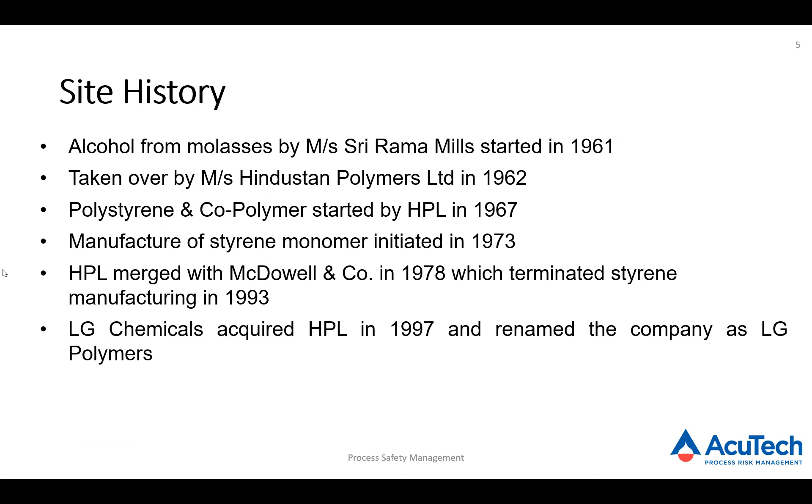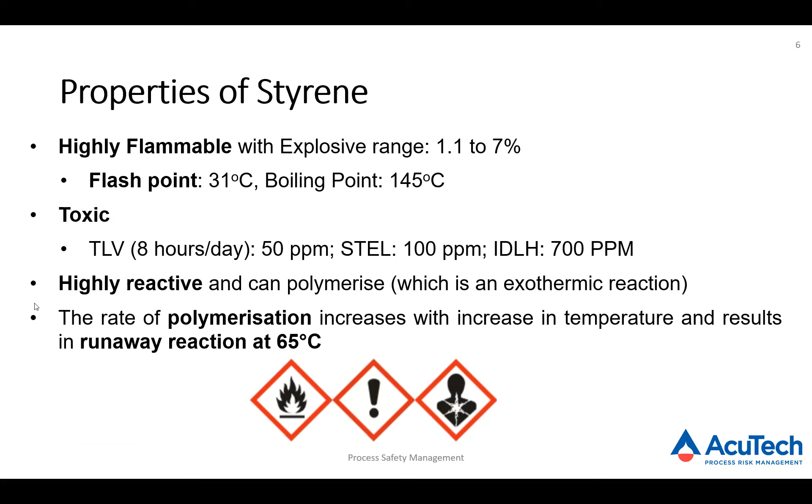What happened on that fateful night of 7th May 2020 was that LG Polymers was in the process of restarting the plant after the lockdown when this event happened. Uncontrolled styrene vapors were released from the breather valve, flame arrestor, and dip hatch of one of the M6 storage tanks. There were two storage tanks, M6 and M5, and from this tank there was an uncontrolled release of styrene vapors.

The maximum temperature of this tank was noticed at around 154 degrees centigrade, which is equivalent to 1.25 atmospheric pressure, and this led to uncontrolled release of styrene vapors, affecting nearby villages. There were about 12 fatalities, 585 people were hospitalized, and there was loss of livestock and damage to the environment. This was probably caused by the polymerization and runaway reaction of styrene due to increased temperature. And this webinar is discussing the reasons why it would happen.

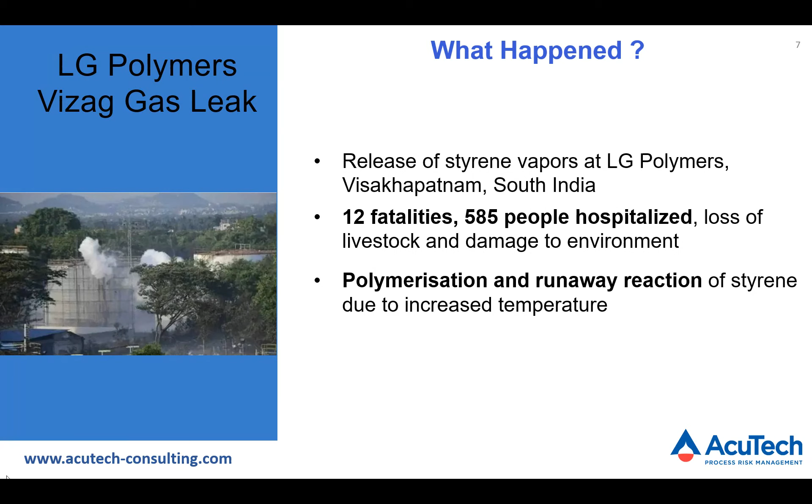This is the brief chronology of the events that occurred on that night. The plant was being restarted after a lockdown period due to the COVID-19 pandemic situation. The plant was down from 29th March till 6th May. There was very less manpower at the site than the usual deployment. Startup activities were initiated on 6th May, and in the early hours of 7th May, the tank temperature started increasing. Around 2:54 am, a gas detector alarm was heard in the DCS.

The DCS operator informed the site personnel around 3:02 am, and after that, between 3:30 and 3:35, the director and safety heads, police, fire service, etc. arrived at the site, and the evacuation of the site personnel was started. Simultaneously, the fire service also started using the deluge system. Around 5:15 am, they started dosing of high temperature inhibitors, NDM and TDM. At 6:30 am, the styrene pump out from the storage tank was started to reduce the inventory in the storage tank, and the inhibitor addition was stopped.

It was continued till 3 p.m., but the tank cooling was still continued as the temperature was still on the high side. Around 9:15 p.m., additional evacuation of residents on the upstream side of the plant was started because people were getting affected by the uncontrolled release of styrene. The maximum temperature was observed at about 154 degrees centigrade around 10:45 p.m., and still the tank cooling was continuing.

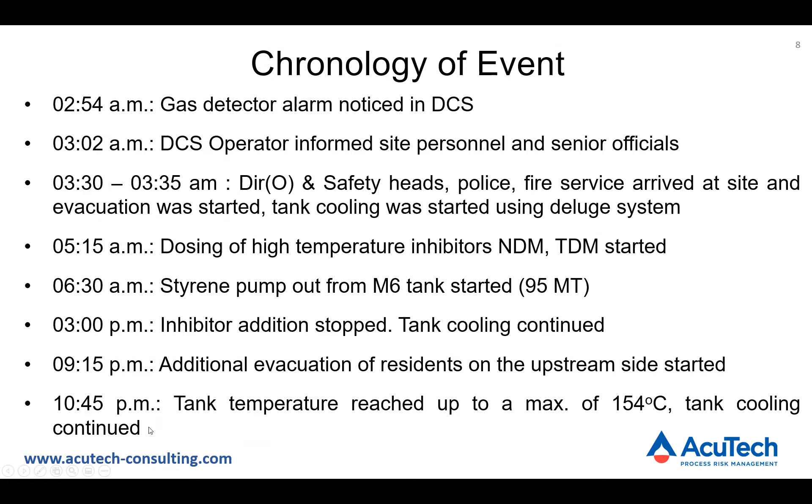What went wrong here? As the father of process safety, Trevor Kletz, had said, a case history shows that an accident generally does not have one cause, but it has many, and the deeper we go, the more causes we find. Every incident takes place when there are multiple failures. Human failures in design, operation, and emergency response were evident in this incident as well.

Similar failures were observed in the Bhopal gas tragedy, which took place in 1984. This emphasizes the importance of implementing process safety management systems consistently in everything associated with a chemical processing facility. If hazard identification, risk analysis, and operational discipline are of high standards, then certainly such incidents can be prevented.

Here, there are some contributing factors which the report has identified. It can be seen here. There were failures with respect to the tank design, tank temperature measurement and control, recirculation and refrigeration system, inhibitor addition protocols, and the polymerization runaway reaction which was caused by thermal or catalyzed polymerization. This conforms to the famous Swiss cheese model, according to which several failures in the protection layers, when they get aligned, lead to an incident of this magnitude.

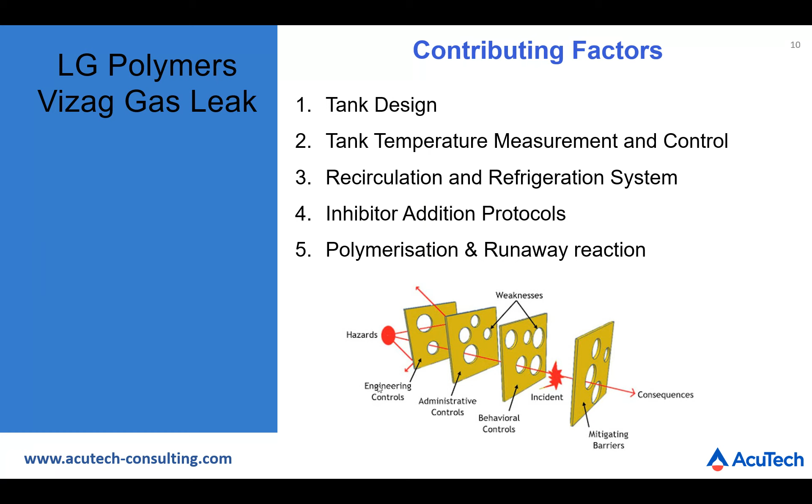Now I request Marty to take over with respect to some features about the tank design. Yes, Marty, please. Okay, thank you, Vijay.

Okay, let's talk about the M6 tank design. The M6 styrene monomer storage tank is a vertical atmospheric tank with a capacity of about 800,000 gallons of unlined mild steel. It's equipped with a set of pumps that can circulate the contents through an external refrigeration unit. The cooling system is operated manually based on tank temperature. However, during the plant shutdown, it was operated daily only during daytime working hours. The tank is insulated to prevent external heat gain, which would increase the cooling demand.

It was built in 1967 for molasses storage, when the plant was used to produce alcohol from molasses, and was repurposed for styrene storage in 1977, when the plant began producing styrene monomer. It's equipped with a flame arrestor vent, a dip hatch vent, and in addition, there is a foam injection connection on top of the tank. In the background, you can see the adjacent M5 tank, which is also used to store styrene monomer and has a similar setup. The M5 tank is a new tank and was installed in late 2019.

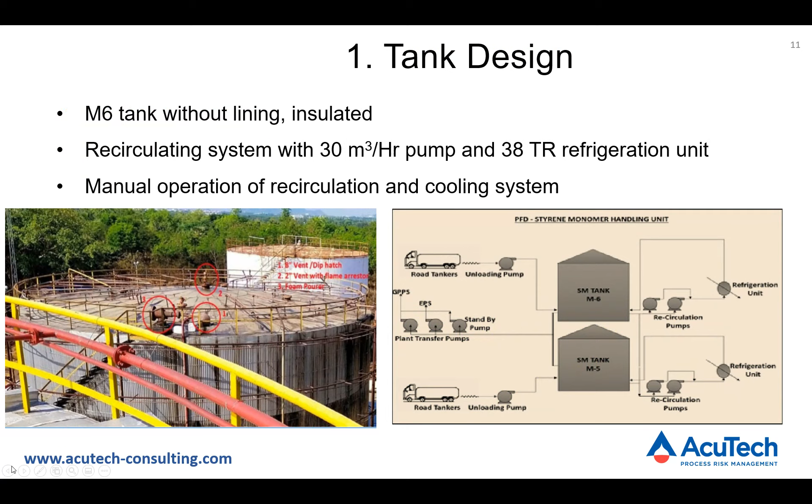There were several issues with the design of the M6 tank. One problem with the tank design is that it has an internal roof support structure which provides additional surface area for styrene vapor to polymerize and accumulate, which forms stalactites inside the tank.

Also, originally, the styrene circulated back to the tank through a float valve, which floated on top of the liquid to provide circulation and mixing from the bottom of the tank to the top. However, in 2019, this float valve became stuck in the stalactites that had formed on the top of the tank.

And the site decided to change this setup from the float valve to a fixed dip pipe to the bottom of the tank, which resulted in the loss of mixing from bottom to top. Liquid was now withdrawn from and returned to the bottom of the tank, which, as we'll see, created layering and temperature control issues. This was increased due to the lack of fresh styrene unloading during the COVID-19 lockdown in the past several months.

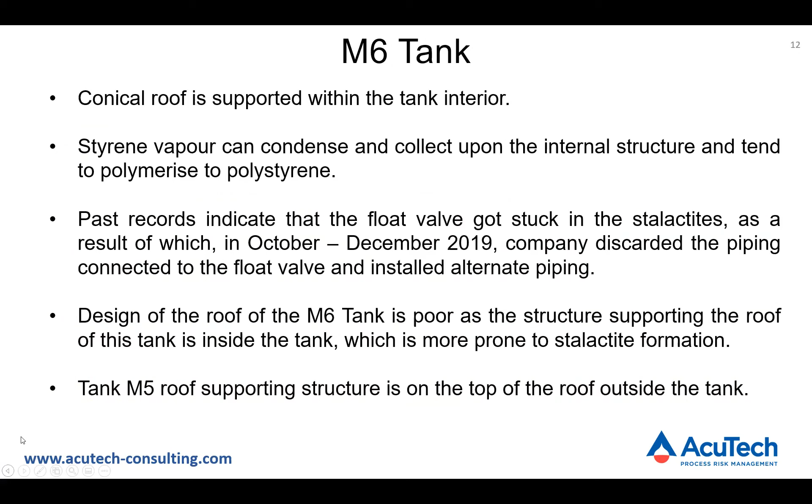By comparison, the M5 tank has an external roof support structure which avoids the stalactite formation issue associated with the internal structure. In addition, there has never been a mechanical integrity inspection of the tank in the 53 years that it's been in operation, including the 43 years in styrene service. This includes an evaluation of the fitness for service of the tank and a life extension if warranted.

As indicated, the material of construction is unlined mild steel, which serves as a catalyst for styrene polymerization. Lined steel is recommended to prevent this potential from occurring. Another issue is that the tank is vented directly to atmosphere instead of to a mitigation system for routine and emergency venting, such as a flare or cryogenic condensing system to prevent release to the atmosphere.

One additional problem was that the plant noted that there was a large crack on top of the tank at the foam injector connection that had existed for some time. And again, the recirculation loop design change created an issue with loss of mixing, which you'll see in the next slide.

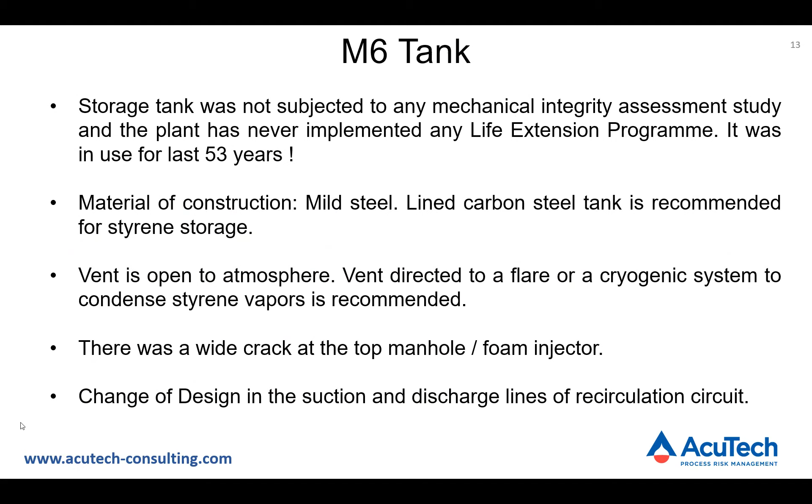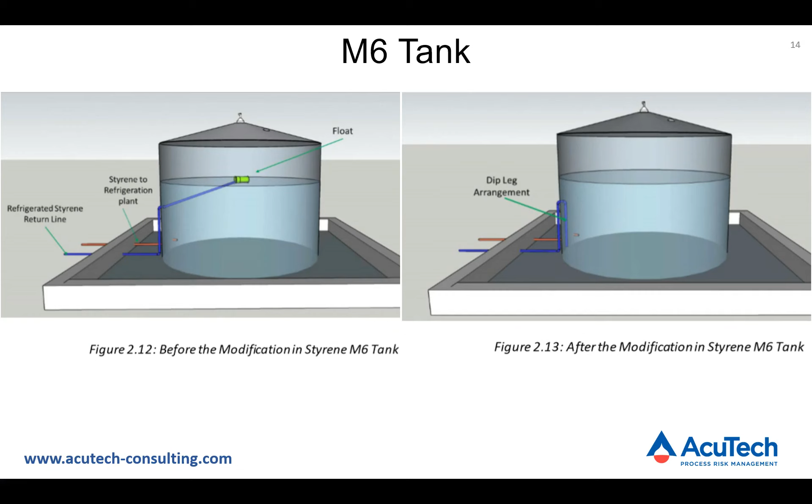There were also issues associated with maintenance of the M6 tank. From vendor literature, we see that cleaning of the tank at least every 2 years to remove accumulated polymer is recommended, in addition to having the internal lining or coating to minimize polymer formation. However, the plant policy was to clean the tank every 5 years, with the most recent cleaning being completed in 2015. This allowed for a significant accumulation of polystyrene polymer inside the tank.

In addition, an inhibitor, TBC, is used to inhibit styrene polymerization during normal operation at low temperatures. Now, this is added by the manufacturer to the styrene received at the plant by tanker truck. Although the plant should have been able to add TBC to the tank if needed, they did not have any stock of TBC at the time of the incident. However, the presence of various contaminants in the tank, such as rust from the unlined interior surface, can also catalyze polymerization, which can exceed the ability of the TBC to mitigate.

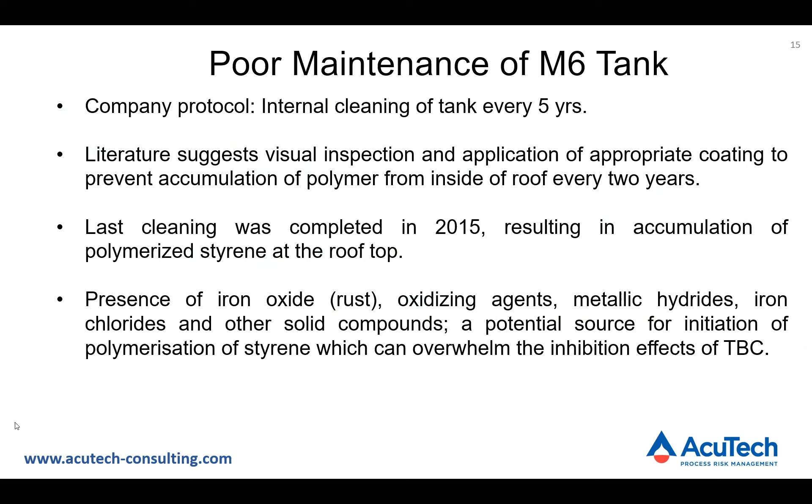And now we'll turn it over to Vijay to talk about temperature measurement and control.

Apart from the tank design and the issues with respect to the maintenance of the tank, there were some issues with respect to the temperature measurement and control system. The temperature measurement was restricted only to the bottom zone of the liquid, whereas the top and middle zones may have different temperatures because of poor mixing. As we saw, the modification was done without ensuring that the mixing would be adequate.

There should have been at least 4 to 5 temperature measurements along the 12-meter height of this tank to measure the true temperature of the different zones in the tank. The tank M5 had temperature measurement probes at 3 locations, but M6 had only at the bottom. And the operations staff always believed the bottom temperature to be the temperature of the whole bulk of the liquid, which was incorrect, and that led to the thermal stratification.

As can be seen in those figures, the first figure indicates that even though the bottom temperature might indicate 17 degrees centigrade, the top layer could be at around 35 degrees centigrade, wherein the polymerization can initiate. This also causes issues with respect to the TBC content. If the temperature is around 17 degrees centigrade, the TBC content, which is expected to be maintained at 15 ppm, would remain uniform throughout the storage tank. But if there is a higher temperature on the top layer, then certainly the TBC inhibitor content would also reduce periodically.

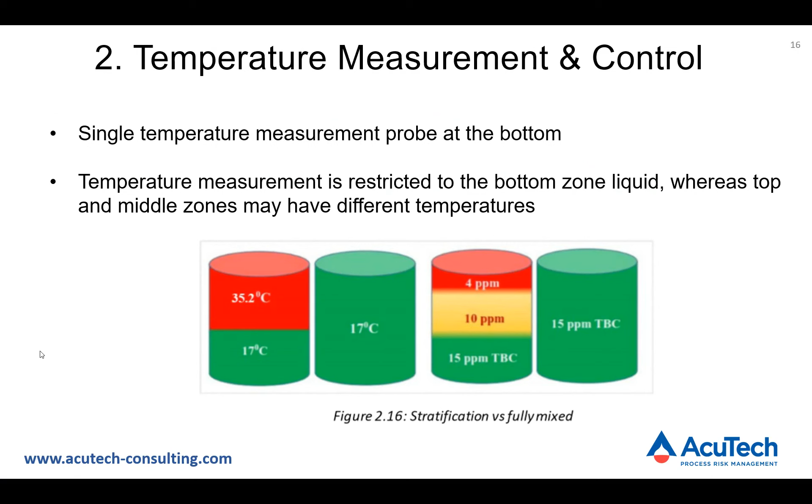This graph shows the temperature profile of the M6 tank. It is evident from this temperature graph that the temperature was by and large stable below 20 degrees centigrade until about 3 a.m. of 7th May. And then it started increasing thereafter. The rise in the temperature was sudden and occurred at fast rate, thereby pressurizing the tank.

The rate of increasing of the temperature slightly reduced between 5 a.m. to 9 a.m. and thereafter again started increasing, even though the tank cooling measures were being undertaken by the site using the deluge system. From 3 p.m., there was a further increase in the rate, and finally the temperature peaked around 154 degrees centigrade. That was recorded around 10 p.m., which was equivalent to 1.25 atmosphere pressure, and that continued the release of styrene vapors in the uncontrolled manner.

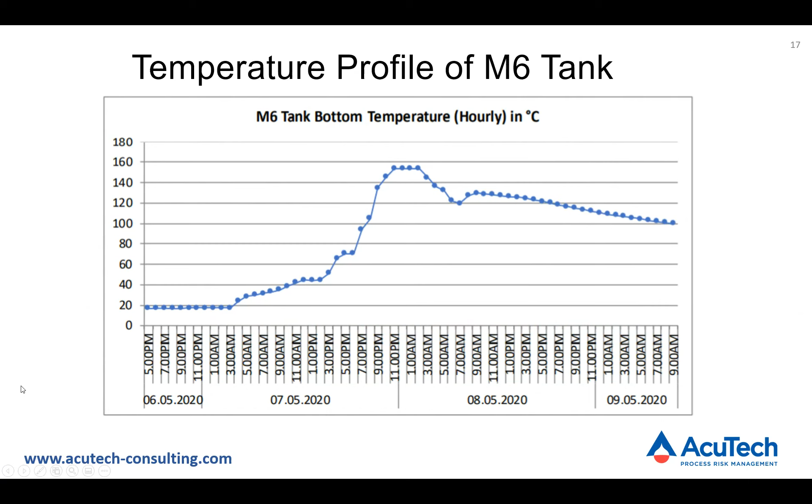Apart from the cooling methodology, there were issues with respect to the recirculation refrigerant system. The preferred storage temperature is in the range of around 10 to 18 degrees centigrade with upper limit of 25 degrees centigrade. If the temperature approaches 20 degrees centigrade, the tank contents must be cooled. It was revealed that there was no high temperature alarm on the tank. There was a practice to operate the refrigerant system manually during 8 a.m. to 5 p.m. every day. However, on 6th May, the system was stopped at around 3:45 p.m., assuming that the tank is cold enough.

Temperature of liquid styrene monomer is very crucial factor. The temperature maintenance throughout the large storage tank at around 15 to 20 degrees centigrade is essential in the light of possible runaway polymerization. For a place like Visakhapatnam, the temperatures mostly ranges from 20 to 36 degrees centigrade. It is essential to operate the refrigerant system on a continuous basis to ensure that the temperature at all levels is below 20 degrees centigrade.

It was also put forward that possibly the R-22 contamination could have happened due to the leaks in the refrigerant system because the mechanical integrity of the cooler in the refrigerant system probably was not ensured. Possibly there were chokings inside the refrigerant system valves and lines which might have clogged during the shutdown period, and the contents could not have been cooled as the pump motor had tripped due to the viscous polymer present.

Now we'll talk about the testing protocols. Marty to take over.

Okay, as mentioned earlier, TBC is used to inhibit polymerization of styrene at low temperatures. For the temperature range normally maintained in the tank, this requires a concentration of 15 parts per million of TBC to be maintained, as Vijay indicated. Routine sampling and analysis should be done to confirm the proper TBC level, ideally daily sampling from both the top and bottom of the tank.

During the lockdown, however, samples were taken sporadically from the bottom and top of the tank. Due to the change in the circulation system and loss of mixing, samples taken were not representative of the bulk contents of the tank. It should be noted that the plant had not added TBC to the tank in at least 10 years. Due to the high turnover of material in the tank and the addition of TBC by the vendor to the deliveries, there wasn't a concern about the TBC depletion under normal operating conditions.

However, there were no styrene deliveries or usage during the lockdown period, which allowed the TBC level in the tank to drop, again undetected and aggravated by the loss of mixing due to the aforementioned circulation piping change, which also allowed for temperature differentials inside the tank. Higher temperatures increase the depletion rate of the inhibitor.

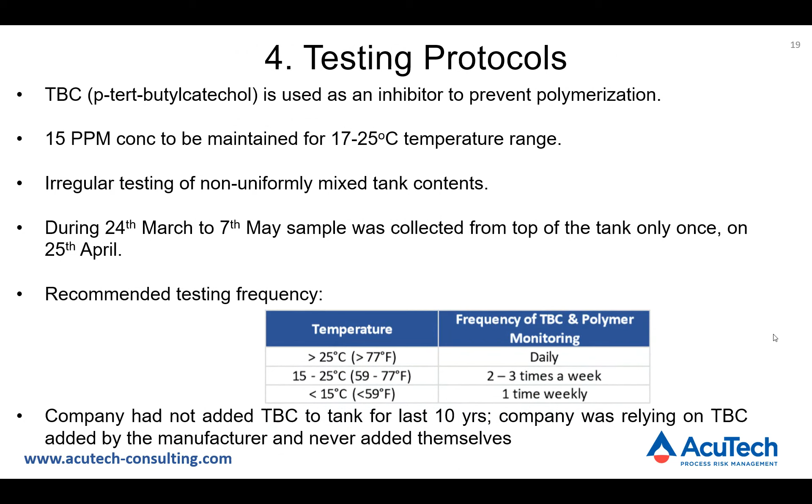Another issue with styrene is that when it is exposed to heat, it forms free radicals. These styrene radicals react either with oxygen to form peroxide radicals or with styrene to form the polymer chains. In the presence of sufficient oxygen, the peroxide formation is significant because this reaction of peroxide radical formation is much faster compared to the polymer formation with styrene. So oxygen works as a polymerization inhibitor, while TBC controls its efficient use.

Unfortunately, there was no monitoring device or monitoring system in place to measure the level of dissolved oxygen in the styrene monomer tank, in the M6 tank, or in any of the other styrene tanks at the facility. This is not acceptable, as dissolved oxygen is a critical input to the effectiveness of the inhibitor.

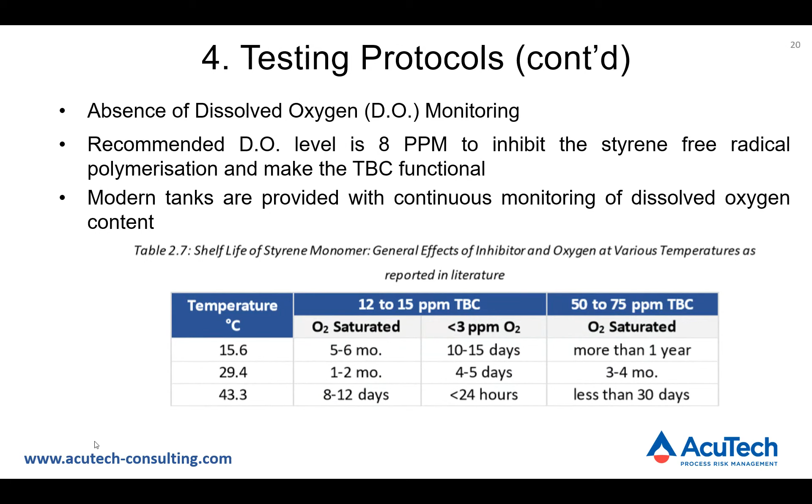As previously mentioned, polymerization generally takes place by free radical reactions, which are initiated by high temperature or a catalyst such as iron. The polymerization rate increases at higher temperatures, which is increased due to the heat generated by the exothermic polymerization reaction.

Since there's evidence that the effectiveness and concentration of the TBC inhibitor was reduced and bulk mixing and cooling was inhibited, it's apparent that this incident was caused by a runaway polymerization. Lack of dissolved oxygen may also have been a contributing factor, as well as the presence of polystyrene stalactites, which may also catalyze further polymerization if they contact the liquid.

Analysis records indicate that the level of polystyrene contamination of the tank increased slightly in the month prior to the incident and dramatically in the 10 days prior to the incident. However, no action was taken by the site as this was considered to be a quality issue and not a safety issue.

The increased temperature due to the runaway polymerization caused boiling of the styrene and subsequent vapor release from the vents as well as from the large crack at the foam injection point. Had these not vented the vapor, catastrophic failure of the tank could have resulted.

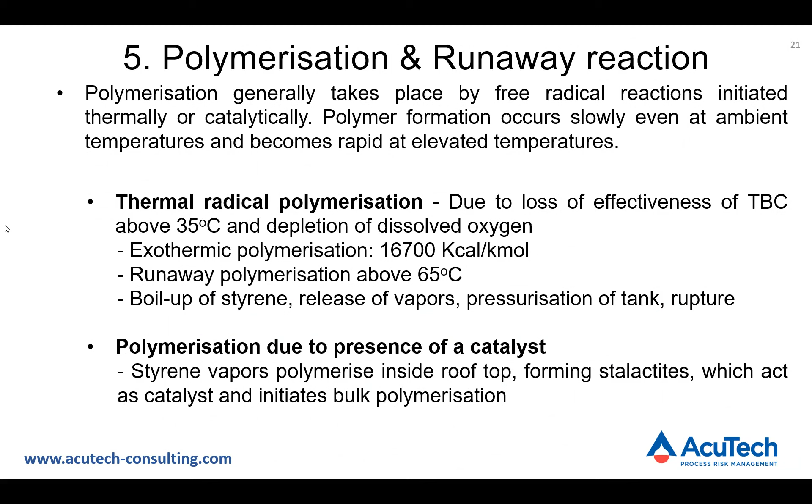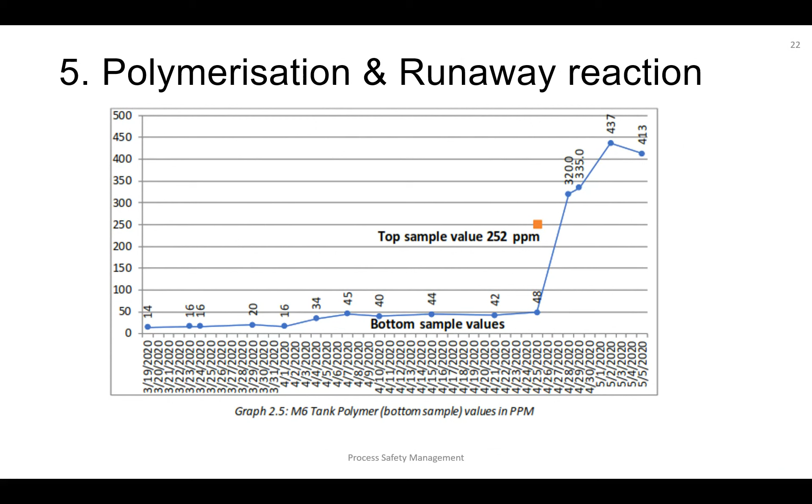Next, BJ will talk about consequences of the incident.

So these were the major contributing factors which caused this incident. There was about 1,842 metric tons of styrene present in the tank on the day of the incident, and it is estimated that about 818 metric tons of styrene vapors were released, and that caused the styrene concentration above 1100 ppm, which extended up to 420 meters from the storage tank.

This resulted in 12 fatalities and hospitalization of 585 people from nearby villages. And this required evacuation of nearly 20,000 people from the nearby areas. Around 17,000 houses and residences were evacuated.

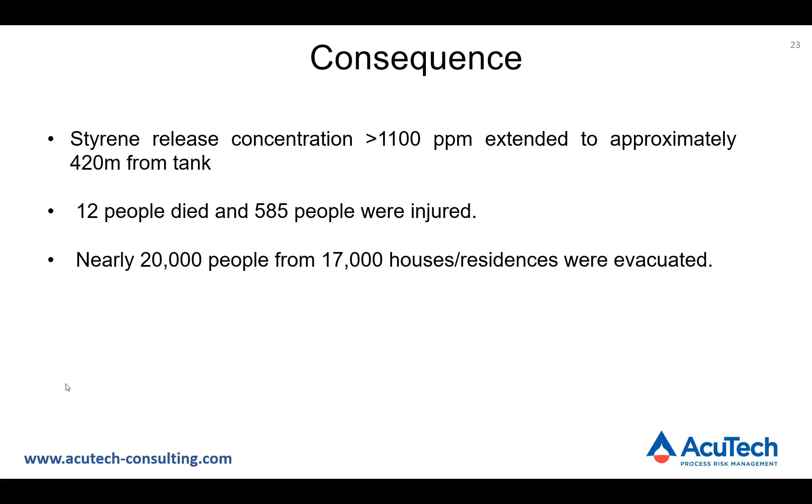Marty will talk about the root causes here.

Okay. The investigation report lists 13 root causes of the incident. These include modification of the tank recirculation piping, as we've mentioned, inadequate operation of the refrigeration system, inadequate temperature measurement and lack of alarms, lack of a tank lining and the external roofs and external roof supports, as well as internal cleaning, as recommended by the supplier.

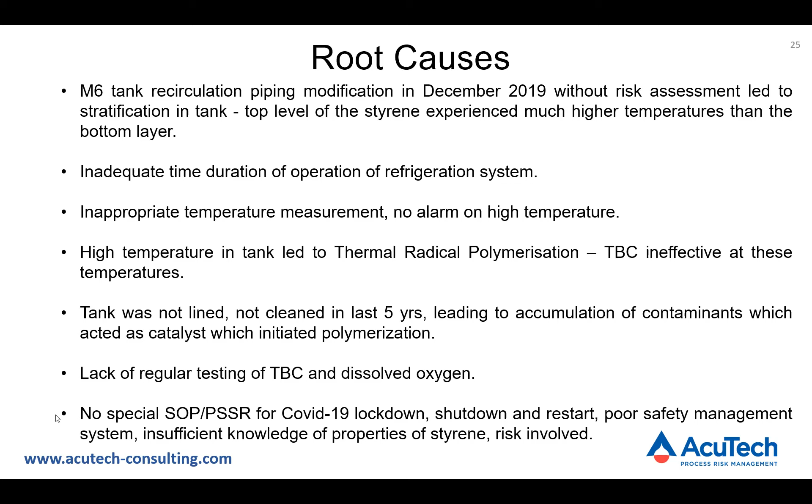As discussed previously, the fault tree for this incident identifies many root causes and contributing factors, including the poor tank design, including the internal roof structure, lack of lining, lack of temperature monitoring, circulation modification, and lack of cleaning. The lack of qualified and competent technical personnel. Poor temperature monitoring and control, including insufficient chiller capacity, lack of mixing, lack of temperature monitoring, and the heat gain due to circulation pump deadheading and inadequate insulation.

High polymer content in the styrene, which was not identified as a safety issue. Lack of process safety management system, and poor monitoring and control of the TBC inhibitor concentration, including dissolved oxygen, lack of mixing, which was aggravated by the lack of turnover due to the COVID-19 shutdown. All these issues are discussed thoroughly in the investigation report.

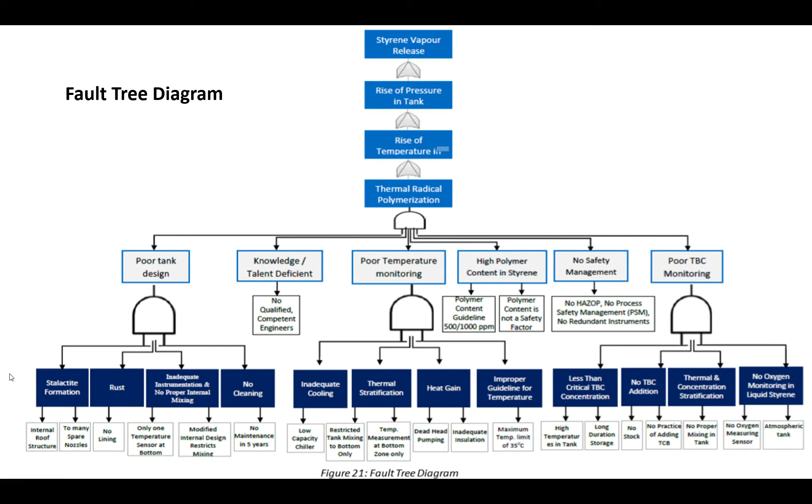Now Vijay will cover the recommendations from the report. Due to all these failures which were observed by the high-powered committee, there are suggestions to avoid the recurrence of such an incident either at the site or at other sites.

The tank must have a floating valve circulation technology which provides adequate styrene circulation and mixing to have uniform mixing and temperature control throughout the tank. There must be provisions for mixing in case this circulation system fails. The material of construction of the tank should be carbon steel with coating inside.

A few more suggestions were there with respect to automatic monitoring of inhibitor content and dissolved oxygen, and ensuring a siren during emergencies for raising an alarm to the nearby community in case of any release. Units or factories storing or processing styrene monomer must undertake annual safety audits. SCBAs and other emergency equipment required for handling such chemical disasters should be made compulsory. Gas detectors shall be provided at the boundary of the factories with an alarm in DCS.

Process safety management shall be made mandatory for all the factories covered under the MSIHC rules. And hazard identification studies like HAZOP and the resolution of recommendations shall be made compulsory for all hazardous process factories or units where processing or storage of hazardous chemicals takes place.

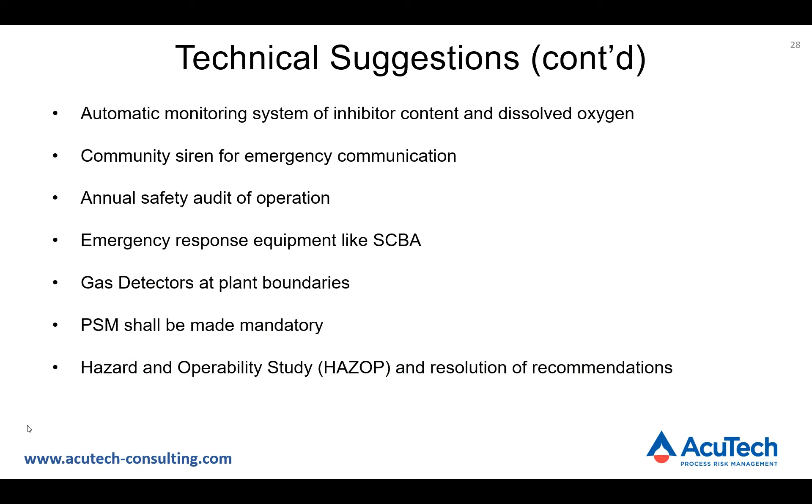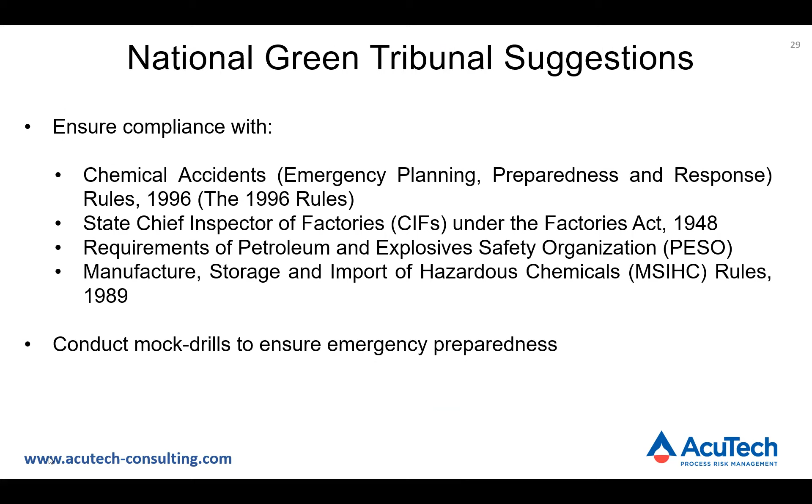Well, thank you, Vijay, and thank you, Marty, for the presentation. It's a good review, and I think it illustrates how, as you noted at the beginning of the presentation, Vijay, it's not just a single major failure that occurred, but a series of small failures that aligned. Those small failures can seem inconsequential on their own, but we have to remain vigilant in process safety, because if they're allowed to exist and they do eventually align, we do end up with catastrophic incidents. I thought it was also quite interesting that this was so deeply related to operational changes at the facility related to the COVID-19 lockdown, that the facility had been shut down, and this was during a restart. Startup's always a difficult time, and I think the challenges that operating companies are facing right now with COVID make those operational changes even more difficult than ever. But thank you both for all of that information.